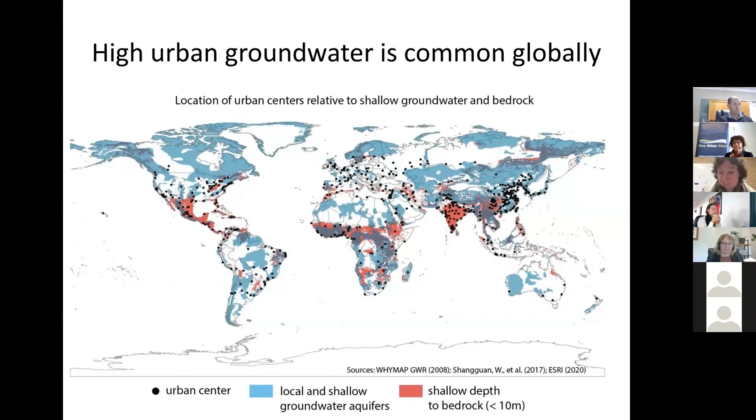So why is Perth such a weird place? Well, I can't resist getting a little bit university professor on you all and insisting that it's really a function of geology and geomorphology. So Perth, as I hope most of you might know, is located on a sand plain known as the Swan Coastal Plain. And the boundaries of this are the Indian Ocean to the west and a fault known as the Darling Fault to the right, to the east.

And as we move east of the Darling Fault, we move onto the very ancient, indeed Precambrian rocks of the Yilgarn Craton, which is the geological formation that you might know as the Great Western Plateau and occupies about a third of the nation. Now, the Darling Fault represents one of the places where the supercontinent of Gondwana was ripped apart. And the other side of that divide is still known to us today. We find it in northern India, where it forms what we would recognise as the Himalayas.

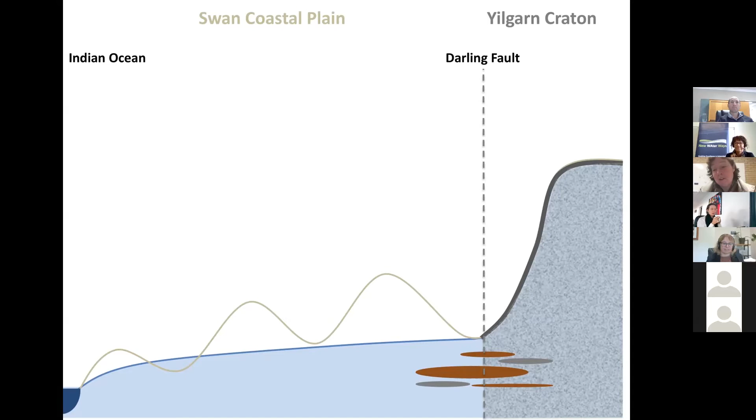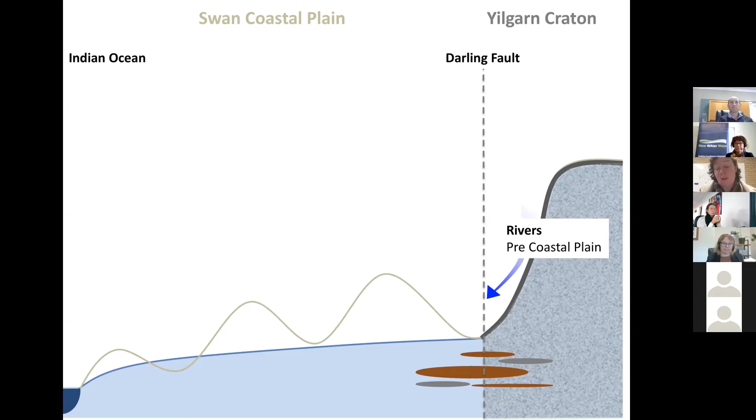Things are a little bit less dramatic here in Perth, and what we've seen mostly happen at the Darling Fault is a long history of river formation coming off of the continent, and then that interacting with the deposition of sediments by the Indian Ocean to form a series of coastal dunes which progress from the very oldest, which are nearly 1 million years old, right next to the fault, to younger dunes that were formed really around the glacial and interglacial periods as we move closer to the coast.

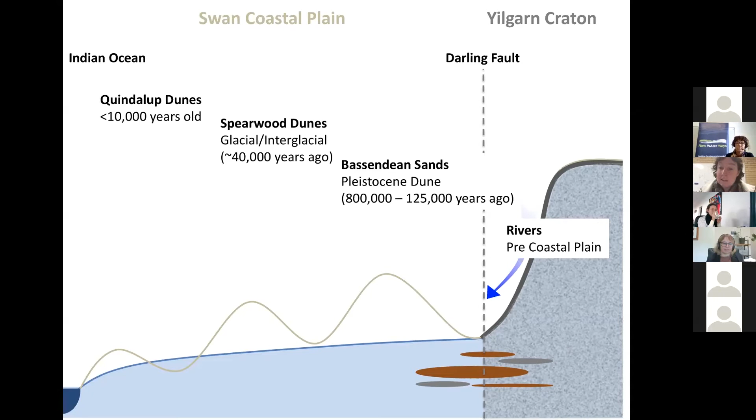And then the rivers have continued to flow and interact with those dunes, and of course that causes them to slow down and to deposit the sediment they carry, so that the other thing we see on the coastal plain is, at the foothills of this escarpment and in the floodplains of the rivers, the deposition of colluvial and alluvial material that are known as clays to us colloquially.

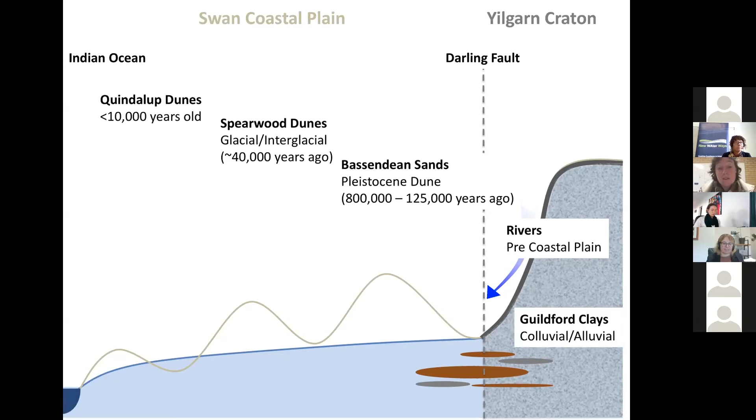So it's within all of these sediments that Perth's aquifers form, and they tend to flow mostly from the east to the west, sort of following the slope of the land down to the ocean. And as they do so, they intersect with the topographic highs and lows created by that dune system.

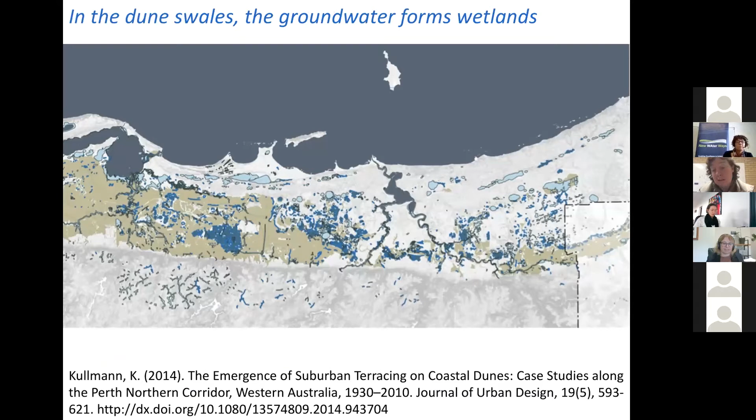So here we've got the Swan Coastal Plain, and it's been rotated so that north is to the right-hand side of this image. And what we can see in light blue are chains of wetlands that broadly run north and south and which are following the swales in between these dune systems. So this is where the water table has come up to the land's surface.

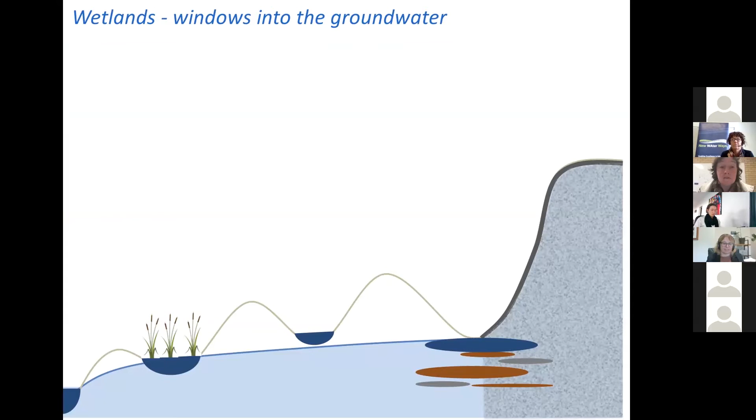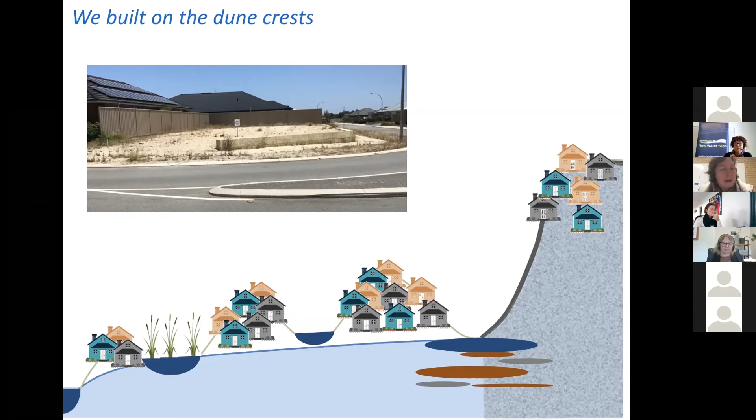So this is where we decided to build a city. And the way that we've been doing this is to primarily build on the crests of the dunes, which makes plenty of sense because these dune crests are very well drained, they have lots of clearance to the groundwater, and they're really a very unchallenging sort of a development environment. And this has been going on now for quite some time, but we're running into troubles.

And the troubles are that these really prime developmental sites that are so easy to work with have largely now been built out, so that new land releases around Perth are increasingly occurring in areas subject to high groundwater, whether that's on the clayey areas as we move into the northeast and to the south along the escarpment, or whether it's around the wetlands and just the shallow water table in the sands.

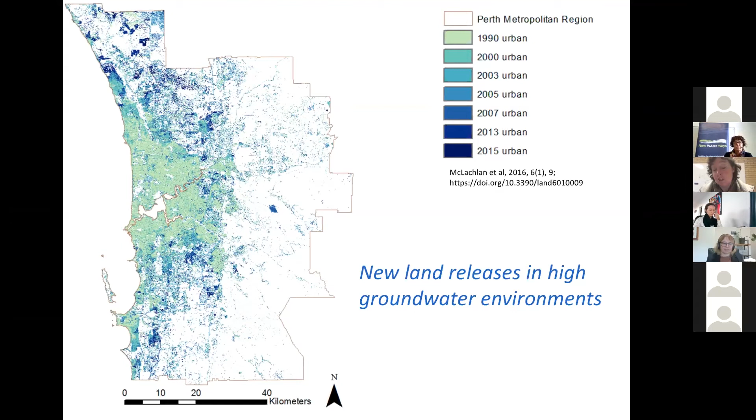So this creates a number of challenges for urban development, primarily that we need to have our urban infrastructure sufficiently separated from groundwater in order for that infrastructure to fulfill its roles. So we have many specifications, perhaps most significantly for minimum clearance levels between roads and the groundwater.

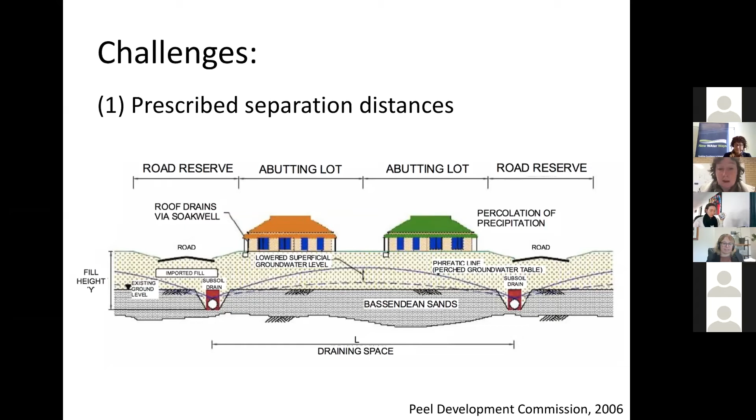And in order to achieve those separation distances, what we usually see is drainage of the groundwater installed beneath the roads. And so that's called out in red here as so-called subsoil drains. So these are really just permeable pipe that allows the infiltration of groundwater into a piped drainage system. We also, of course, do need to maintain sufficient separation distances between the groundwater and other parts of the urban fabric, whether that be playing fields that can't get too squishy or housing areas.

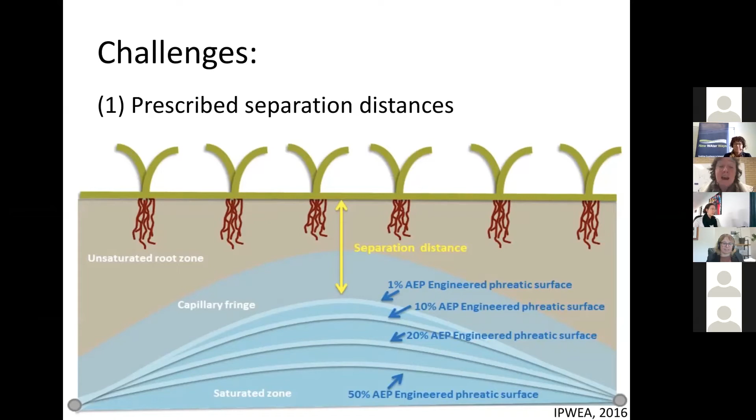One of the most problematic of these is really thinking about the separation and clearance to building foundations, because this impinges upon the geotechnical classification of sites and therefore the level of engineering that's required in the housing foundations. And so what the development industry would really like would be to develop so-called Class A sites where moisture changes are happening far enough away from the land surface that they can't cause any ground movement. And very often, to achieve this is going to require modification of the site as an alternative to moving to more intensively engineered construction.

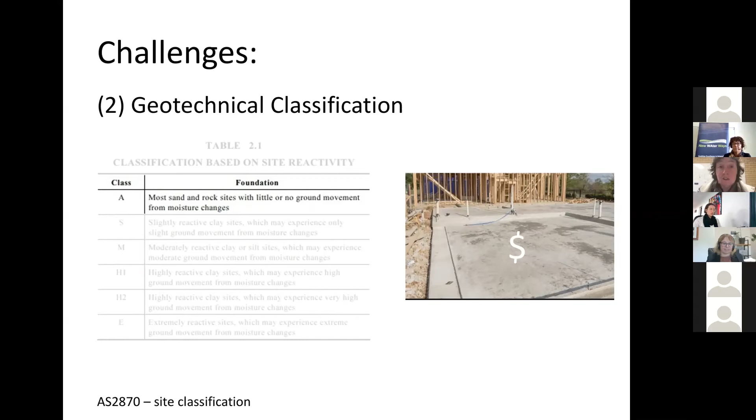We also, from a stormwater and water management point of view, do need to think about what shallow groundwater means. And it really means that often there's not a lot of space under the ground in which to do things like achieve fall for our piping. So whether we're thinking about creating functional hydraulics for just getting our wastewater off-site, or for our immediate management of drainage from roofs or roads, or whether we're thinking about the additional demands for fall that are created as we start to bring water treatment features, and particularly water-sensitive urban design type features, into the developed landscape, we often find ourselves being constrained by how much fall can be achieved before you start to hit the water table.

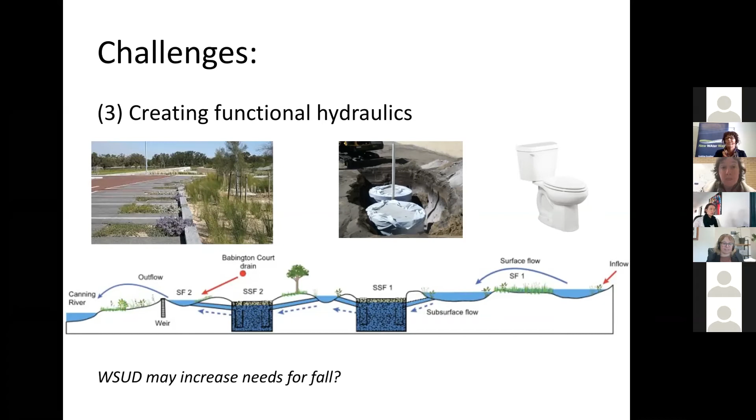Why is it problematic? There's a few issues. The first is that the importation and use of fill is economically costly. And what we understand based on the numbers from when we were consulting around this, which is now probably 18 months old, and I suspect things are worse now, is that fill could comprise up to 1/3 of the developed cost of lots. To put it another way, the cost per cubic metre of clean sand fill in Perth was 18 months ago around $30 per cubic metre.

Now, why does this matter? Well, this matters because the developments that we're looking at are on the urban fringe, and they're places where first home owners or people who are just coming into the financial ability to own their own home are looking to buy. So this is not an area with great financial leeway. Instead, it's a part of the city where small changes, small increases in the cost of housing mean that potential home buyers are unable to secure a loan or to afford a property.

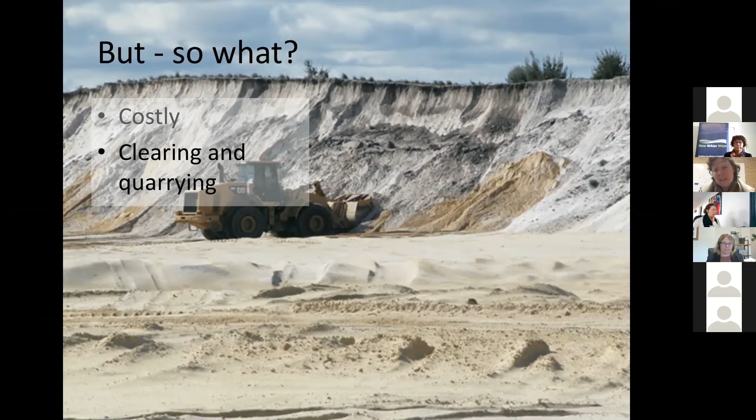It's also not an environmentally benign thing to be doing, to be carving up sand dunes in one part of the world and dumping their sand in others. There's very extensive areas that need to be cleared and quarried in order to obtain this fill. And increasingly, those are located a long way from the city, so that equally significant haulage and carbon emissions can be tied to the use of fill. Now, I don't have any good numbers on this, but what we can say with confidence is that the more sand we're moving, the greater those sorts of costs are going to be.

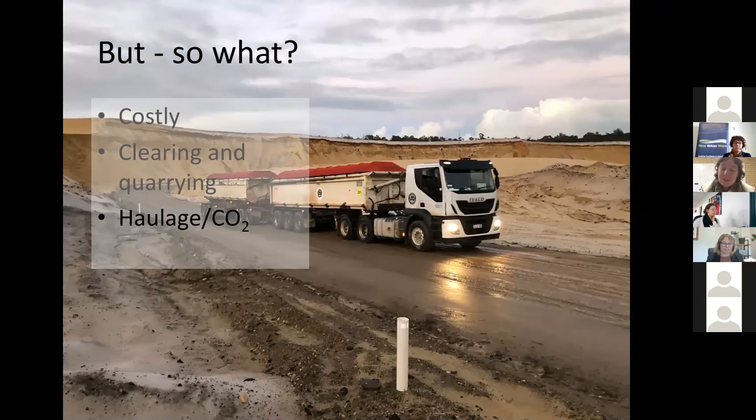We also achieve something quite strange at large scales as we think about the use of fill, which is that the developed landscape we create doesn't necessarily adhere any longer to an environmental, geomorphic or hydrological logic. And this is one of those things that you never notice until someone points it out to you. And now when I drive around the outer suburbs of Perth, all I can see is this sort of jigsaw puzzle of different land levels associated with different developments having taken different approaches to how they use fill. So I've started calling these Frankenstein landscapes, which have aesthetic and presumably environmental consequences.

We don't know a lot about those environmental consequences, other than clearly that erosion at the edge of fill can be one of them. But presumably, when we have only 30-metre buffer distances that have previously been required between this sort of land elevation and streams, wetlands or other sensitive areas, there's plenty of scope for sediment movement, as we see here, for weed growth, but also for local groundwater mounding inside our filled areas to start changing the gradients and the flow of water in this very groundwater-driven area.

Another issue with our Frankenstein landscapes and all this cutting and filling is that it compounds Perth's existing problems of removing every skerrick of vegetation prior to developing urban areas. And the reason, of course, is that if you need to raise your land surface by a significant margin, it's almost impossible to keep any existing trees alive because they are growing in a land surface that's quite different, and trees in holes doesn't work too well.

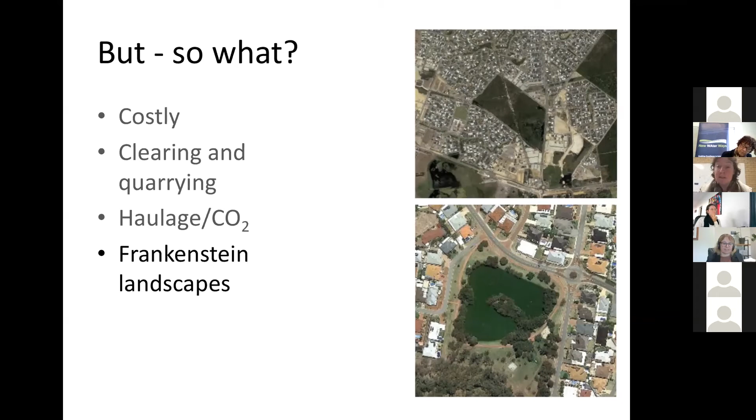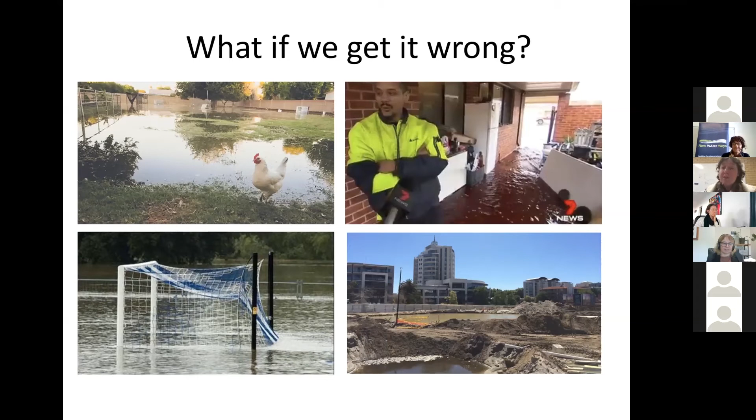And that, of course, is only thinking about what happens if we are adequately managing groundwater with it, because the flip side of this is what happens if we get things wrong. And what happens if we get things wrong, of course, is that water comes up to the land surface with consequences that may be relatively minor, in the sense that your chickens become aquatic or that your playing fields are submerged, but can also have really significant costs for homeowners whose property becomes damaged, or for developers who, as you can see on the bottom right here, maybe didn't think quite hard enough about their groundwater before starting to get their foundations in. So there are significant consequences for getting things wrong, and it's costly to remediate.

Here's another example of remedial works, this now in the east of Perth. Here it was the public open space that was routinely flooded due to groundwater. And in order to create some storage for that water, they've excavated what was green space and put in this detention basin. And I think, quite apart from the capital cost associated with this, it's pretty hard to view this as an aesthetic improvement or an improvement for the safety of the children who are playing in the neighbouring park. So we have really significant costs that attend to getting things wrong with managing our groundwater.

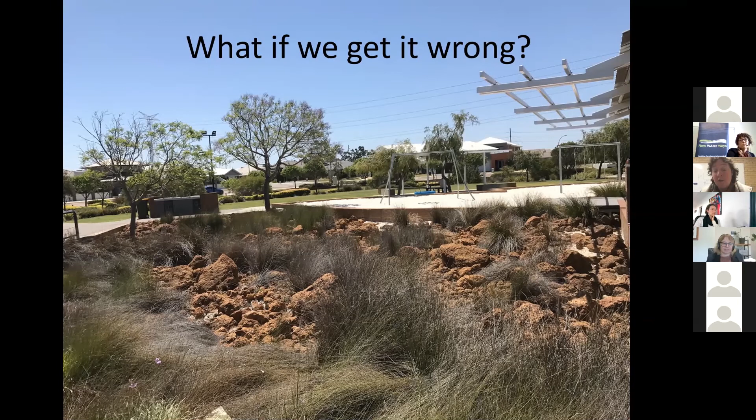So really, I would argue that Perth faces a paradigmatic choice between a current paradigm of managing groundwater, where we modify the existing land surface and then remediate where things go wrong. So we use conservative separation distances, we import a ton of fill, and any problems that pop up, we correct on this as-needs basis. It's really what we're doing right now. But could we shift to a slightly different paradigm where we aim to minimise the use of fill, but aim for more resilient design of our urban area?

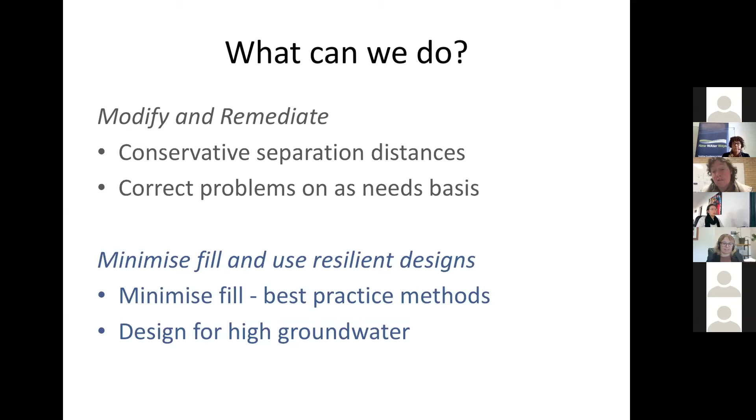So if we're going to minimise fill, we need to look at what our best practices would be for determining what's the minimum quantity of fill we can use. And if we're going to be resilient, then aspects of our urban design need to accommodate the potential for high groundwater. So let's look at what it would take to get us into that new paradigm. And I'm going to argue that it would need some technical shifts, it would need some governance shifts, and it probably requires some cultural shifts as well.

Technically, there's a few things we can do, and I'm not going to dwell on them in great detail because it sort of gets us into boring technical detail. But one would be to have more consistent approaches for how we identify the risks associated with shallow groundwater and associate those with particular development sites. And something like this, a relatively rapid site rating scheme that then prompted different assumed levels of assessment and monitoring and modelling, would be really helpful for decision makers in deciding whether proponents are addressing the risk of groundwater with the right level of care and detail.

We obviously, if we're going to work out how to minimise fill, need to be able to make predictive models of what groundwater will do in the developed landscape.

And there's certainly a lot of modelling out there, and there's some really good modelling, but one of the things that pops up again and again as impeding people's ability to make the best predictions possible is really just the parameterisation of those models and the need for better numbers.

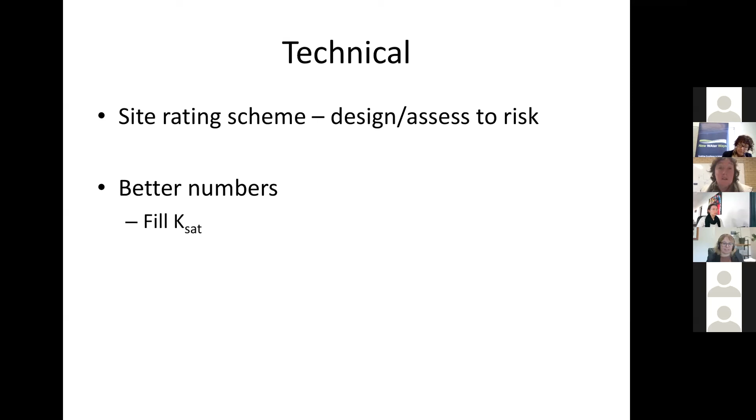One area where we can make immediate improvements is how we represent the hydraulic conductivity of this fill. And there's a really clear need to actually measure this on site in the as-built condition. So that is after imported fill might have been mixed with the local soil and then compacted, rather than what we've seen or anecdotally heard about some modelling doing, which is to rely on the specifications only of the imported fill.

The other area where we have a lot of uncertainty is understanding how evapotranspiration will change post-urbanisation. And the reason that's so important is that in most of these landscapes, the main way that we dry out the landscape and lower groundwater is through evaporation, evapotranspiration. And so having a better understanding of how that loss process is going to change following urbanisation would be very, very helpful for improving modelling.

There's also really a need in the practitioner community in Perth to be a little bit bolder in using sensitivity analysis. And just to give a flavour of why this might be so important, if we go back to the hydraulic conductivity of this fill, the rule of thumb, if you had to guess, is that the conductivity might be around 5 metres a day. But when we look at the range of things that have been measured in the field, it can get as high as even up to 70 metres a day, but it can also be significantly lower, particularly if a bit of clay gets mixed in with the sand, down at less than 1 metre a day.

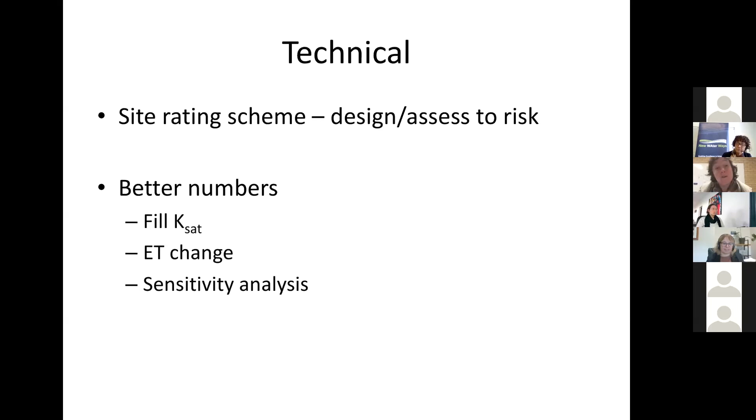And so when I see reports and consultants telling me about how they've varied their hydraulic conductivity by plus or minus 5%, when the actual range spans orders of magnitude, there's a need to think a little bit harder about how well we can constrain those numbers and how much we might need to plan for those numbers being wrong.

And then I guess the final thing I'll just point to technically is that at the moment there's a real lacuna in terms of technical guidance for situations where stormwater and groundwater are as intimately related as they are in Perth. And so if we pick on Australian Rainfall and Runoff as everybody's favourite piece of design guidance, and I don't say that sarcastically, I think ARR is a wonderful document, but it's a wonderful document that does not at all address the potential for groundwater to be a part of stormwater.

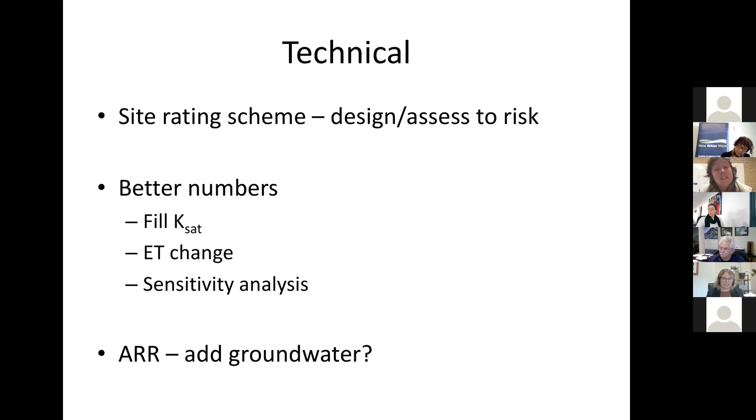You can do a find for the term groundwater in ARR and it really pops up once or twice and not in the context of what shallow groundwater might mean for runoff. So there's really an absence of a consensus-based standard for what's best practice when we have shallow groundwater in the mix.

But leaving that technical and modelling stuff to the side, I think we also need to think about how we design for the fact that high groundwater could impinge upon our urban landscape. And one of the really exciting things about being involved in this project has been learning about how much innovation and how many good ideas are out there, even only within Perth in our practitioner community. There's real appetite for thinking about how to do things differently.

And if we look around the world, we can find lots of examples of backyards that have been built to accommodate high groundwater or even make a feature of it, of yards that have been built to elevate areas of hardstand and protect them from waterlogging and maybe to incorporate surface drainage to allow any seepage to be taken off site, and of completely novel construction methods that mean that we could get out of some of those geotechnical constraints being such a big hurdle.

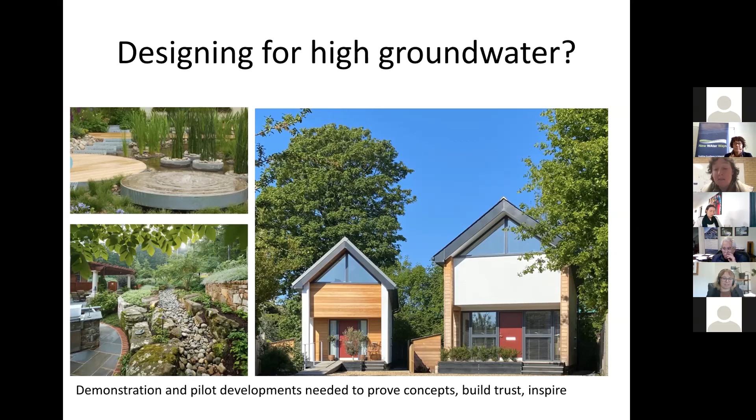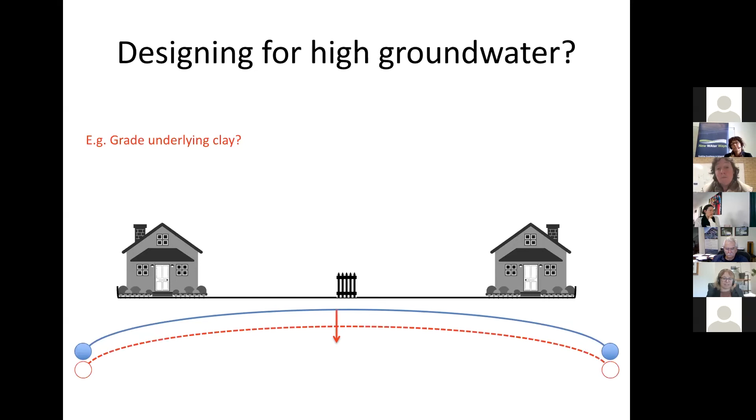So there's lots of opportunities out there. There's much less fancy opportunities as well. So within our stormwater design, we can do things like grade underlying clay layers, so that if this is our sort of cross-section of an urban block with our drains at the road and our crest of the phreatic surface in the backyard, if we grade the underlying clay, we effectively change the direction that groundwater is flowing and end up making it flow towards places where the drains are deeper, giving us a bit more gradient and lowering that water table.

We can also try things that we haven't tried before, and they might require that we think a little bit differently about who owns drainage infrastructure and who is responsible for it. But if we're prepared to say that landowners take some responsibility for this, then we can put subsoil drains in at the rear of lots with a connection out to the stormwater system at the front of lot and lower the water table in backyards in that way.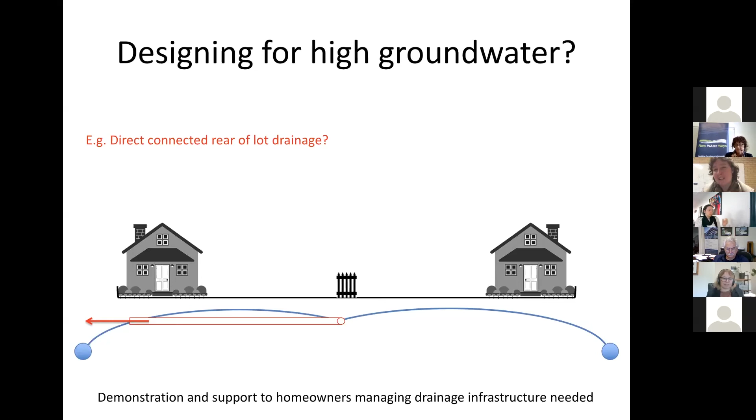Now, if we're going to do this, we need to sort out some of the legal issues. We need to demonstrate that this works and support homeowners in how to manage this infrastructure. But as far as capital goes, this is an extra pipe. It's not really enormous.

No matter where we go with things technically, one thing we need to recognise is that right now in Western Australia, local government authorities are very much in the hot seat of this issue. And the reason that they're so much in the hot seat is that they sort of have to deal with the issue both coming and going. So it's local government authorities who evaluate, request amendments to, and ultimately need to approve the water management plans that are put to them by proponents. But it's also local government that ultimately usually assumes responsibility for drainage infrastructure and for public infrastructure, and so picks up the liability when problems occur.

So, you know, if you do know a local government engineer, probably do blow them a kiss, because they are picking up an awful lot of responsibility here.

What we hear time and again around the Perth area is that local governments find this situation to be difficult to manage, and a large part of that difficulty comes down to resource constraints and their capacity, particularly as these new development areas are becoming more and more environmentally complex. So whether it be that the engineers who are approving developments don't have specific background in learning about groundwater, or whether it be really basic issues like the local government only having one license for GIS software so that there's minimal time or opportunities available to really look at how things plan out in space, constraints on capacity are a real problem for local government.

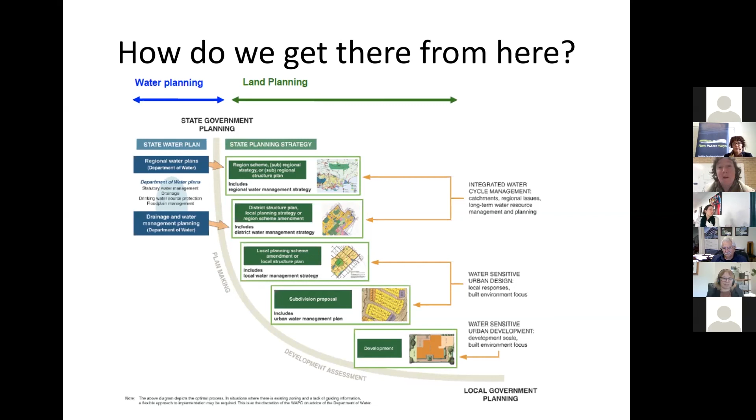What I hope I've convinced you of, nonetheless, is that despite some of these challenges and opportunities for changes in governance and needs for reform, that there is an opportunity for a win-win-win across the development sector, the homeowner sector, and the urban environment by moving towards a paradigm where we minimise the use of fill and have a landscape that is more resilient to the presence of high groundwater.